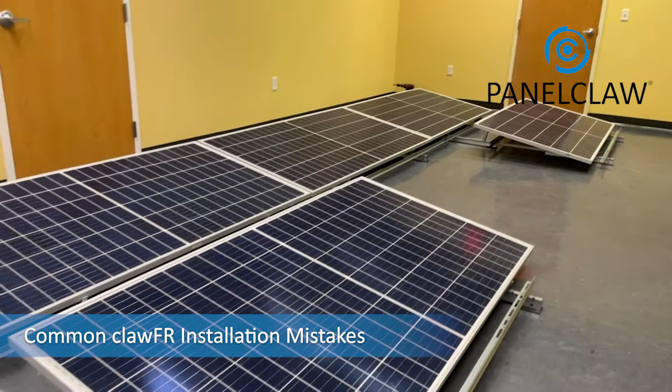In this video, we are going to cover some of the common mistakes made when installing rails to the clawFR system. The information that we will provide is applicable to both the 5-degree and 10-degree tilt systems. Let's start by taking a quick look at proper rail installation.

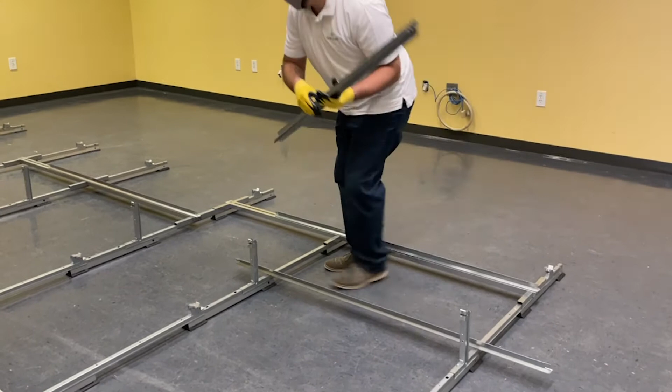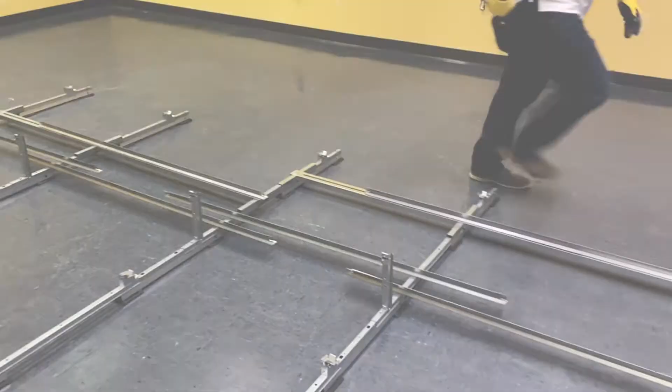Rails represent the east-west structural component of any subarray. Rail segments are connected together to create continuous structural components of varying lengths. Bolts are used to connect the rail segments together and to fasten them to either module connectors or bases, depending on the array design. There are specific riv nuts or pilot holes on the module connectors and bases designed for rail connection.

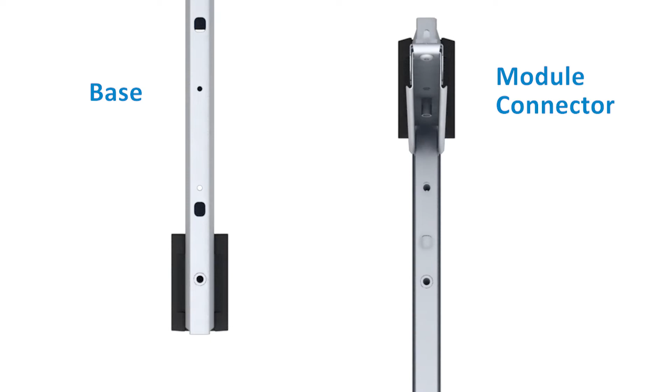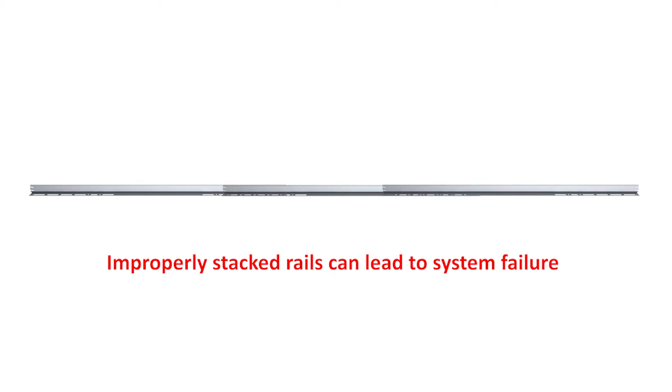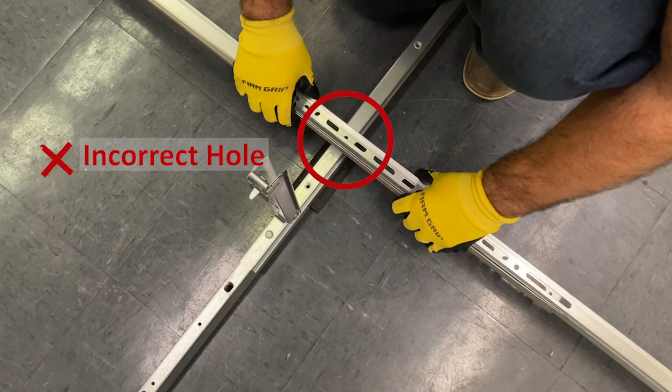It is incorrect to connect rails by stacking them continuously from east to west. As you can see here, each rail segment is being placed on top of the preceding rail segment in a cascading fashion. When rails are improperly installed in this way, the rigidity of the structure is reduced, which can lead to system failure at wind loads below the worst-case site loads. Furthermore, installing the rails in this incorrect manner will also result in the rail connector bolt not being able to go through the correct hole.

Correct rail placement is achieved by staggering the placement order between the S locations and the L locations that span the north and south running module connectors. Start by installing rail segments at each S location in a subarray. Next, place a rail segment at each L location. The L rail is placed on top of the S rails.

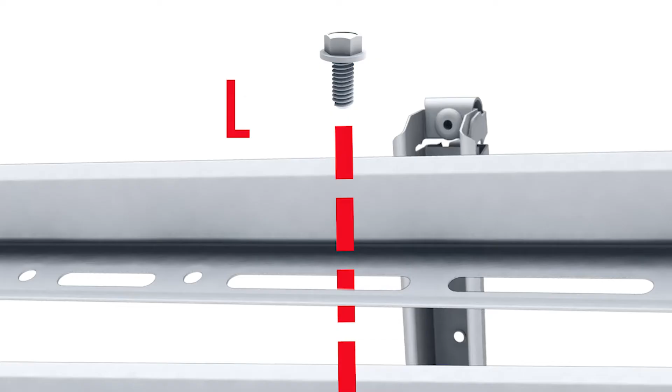When properly stacked, the fastening bolt will go through the hole on top of the L rail, then through the slot on top of the S rail located below, and lastly into the riv nut or pilot hole located on either the module connector or base. It is incorrect to thread the bolt through the slot on the L rail. Tighten the bolts to 6 foot-pounds when installing into a riv nut and 3 foot-pounds when installing into a pilot hole. It is important to ensure that these requirements are met when placing rails.

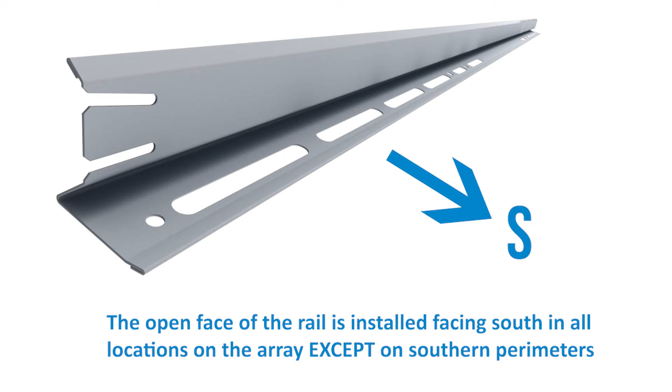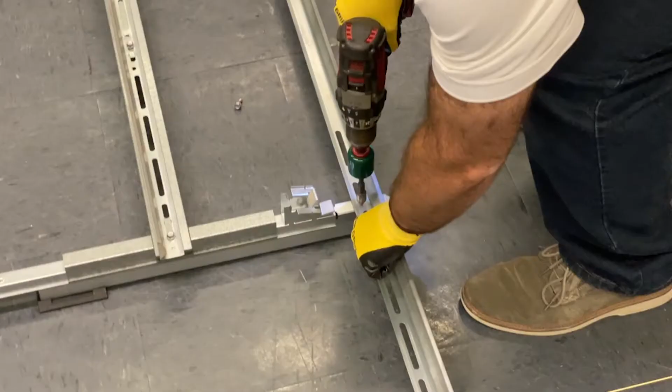Rails are installed with the open face of the rail facing south in all locations in the array except for the southern perimeter of the array. When installing a rail to these southern edges, the position of the rail must be reversed so that the open face of the rail is facing north, or towards the module. Remember to install rails to all southern facing perimeters on the array.

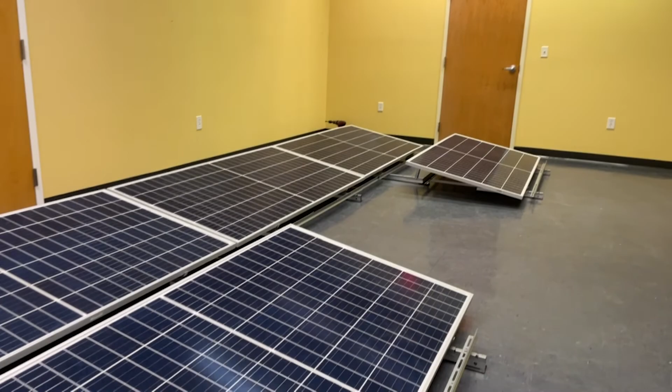This includes interior corners. Interior corners occur when an array includes module omissions due to roof obstructions, system size, or layout constraints which result in rows with unequal module counts. Additional rails are installed to secure the inside corners created by the omitted module.

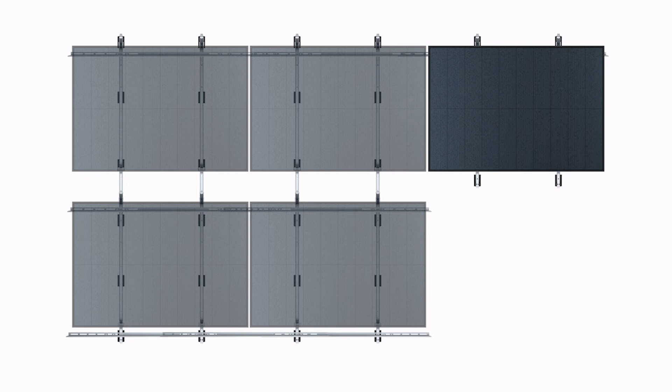An inside corner exists at any location where a module does not have another module to the south, but adjacent modules do. For example, this module has no module to the south of it, but its neighboring module does have a module to the south of it. Therefore, a rail must be installed not only to the southern edge of the module, but also to the southern edge of the adjacent module, creating a more secure structural component.

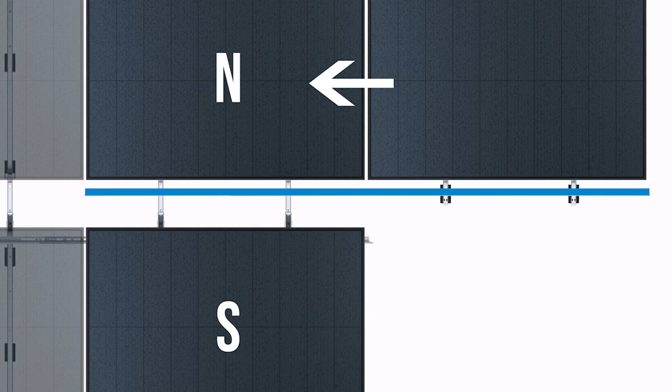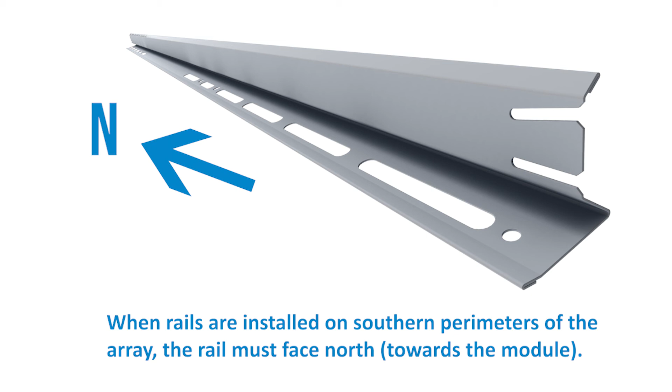Likewise, this module has no module to the south of it, but both of its neighboring modules do. In this case, a rail must be installed on the southern edge of the module and both adjacent modules. Remember that because this module represents a southern edge of the array, the rail needs to be installed with its open face oriented towards the module.